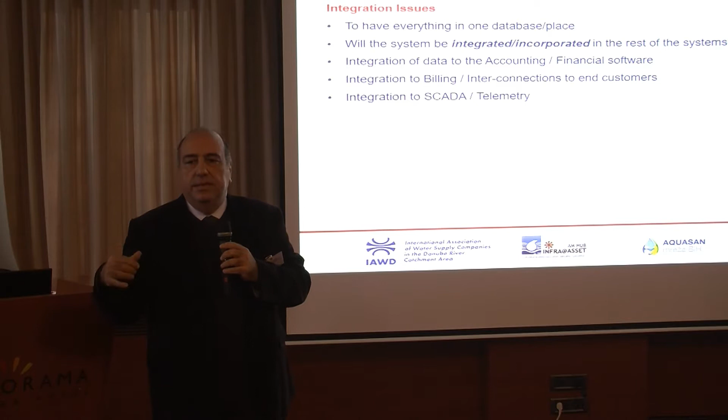One thing I'd like to say is that we as Hydro-Comp are not just producers of software, we're actually integrators. This is our job, this is what we're doing. We know that when we go in a municipal environment, in a utility, they have systems. We're not going to rediscover Earth. We've been there. We know there is a billing system. We know there is a SCADA system. We know there is an accounting system. We know that the utility expects these things to be integrated. So this is part of our overall methodology, overall understanding, and they will be addressed in this session. So, one part of your questions were integration issues.

The second part were related to maintenance and rehabilitation. You asked us, what about management reporting? What about supporting our decision making? What are we going to do about that? You also asked about real calculation and amortization cost. I found that very interesting. And also, one gentleman asked the question, how do we move from reactive to proactive maintenance in our organization?

And the last question, also very interesting, what's the logic of all this program? Why are we following these steps? Why are we following this methodology? Where are we getting to? What is the benefit for the municipality? Why are we doing what we're doing? That also will be addressed.

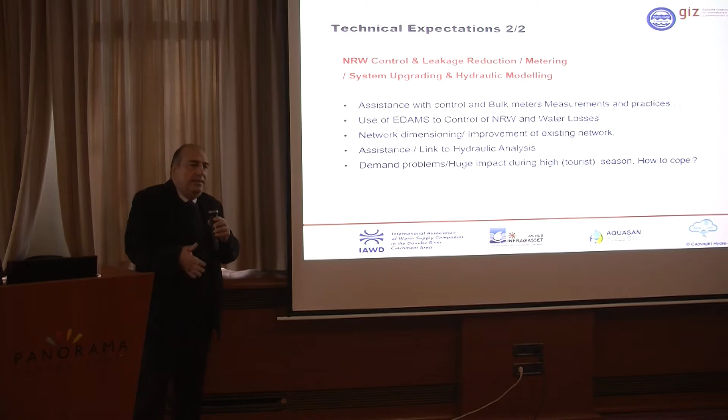The last part were more interesting questions. They involved more technical issues, everything and anything that had to do with non-revenue water, leakage reduction, metering, upgrading, and hydraulic modeling. Now, the questions ranged; some of them were, how do we control the bulk meters and the measurements? What are the best practices? How do we use EDAMS to control non-revenue water? Does what we did in stage 1 have anything to do with non-revenue water? That was one of the questions.

What about network dimensioning, as you mentioned, and improvement of the existing network? We know we have a problem, a network that's dysfunctioning, for whatever reasons. Because, like it was mentioned, in the past there were PRVs installed, in the past there were networks interconnected like a spaghetti system, and nothing makes sense anymore, and we can't make sense out of it. What do we do about it? How will what we do now help us in this process?

That was another question. And then, okay, what we've been told is hydraulic analysis. Where is the hydraulic analysis? Why are we not doing hydraulic analysis? Why are we just capturing data? That was another question.

And the last one had to do with demands. I had a gentleman mentioning the huge variation they have from the high season to the low season, and how that impacts the actual capacity of the system. That's also a serious question, a more complicated one.

So these three sets of technical questions were mentioned earlier. I will try partially to address them through what we're going to do in stage 2 and 3, and then I'm going to come back to these questions after the presentation. So I hope you find this session interesting. My agenda is to describe what will happen next year, 2018, and what will happen in 2019. And in the process, I hope you will see the logic and how the puzzle is built up.

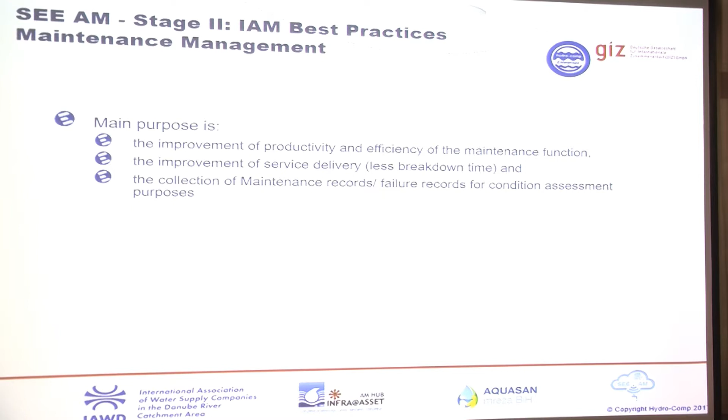So, stage 2 is maintenance. We have to do a number of things to improve maintenance practices. And the purpose of maintenance we can summarize in 3 steps. By addressing the maintenance function, we improve productivity, we improve service delivery, and of course we collect maintenance records and failure records for condition assessment.

Condition assessment, don't forget it. We're moving towards rehabilitation planning. We want to control rehabilitation. That's where the money is. That's where the investment is. That's where the budget is. We have to, in stage 3, look into rehabilitation. If we don't manage to look into rehabilitation, you will never control your costs. But to do that, we have to have reliable maintenance. We have to have properly recorded the maintenance related to our assets. So, we can't jump steps. We have to follow the full roadmap.

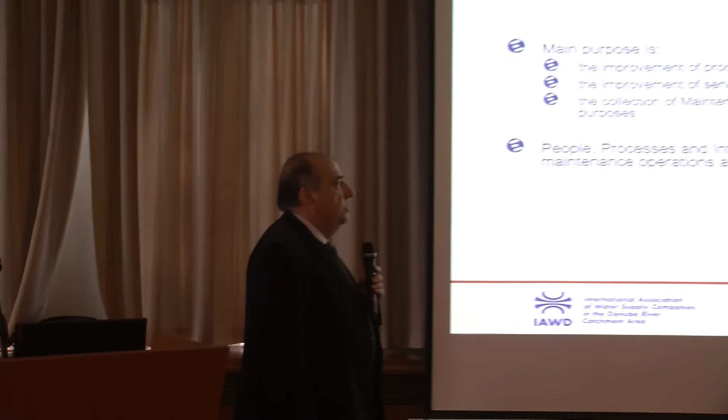So, in the process of next year, we will address people, processes, and information systems, which must be improved to enable proper maintenance operations, according to what we understand, what we have learned and what we have developed from our experience, that is best practices.

At the last training session, we touched the subject of movable and fixed assets. And we said that, look, this is not just about networks. What we're developing is an asset management infrastructure. What we want to do is record all our assets. You must think a bit out of the box. We're not only looking at the networks. Yes, the networks are the most important. Yes, we understand that. That's the source of the problem. But a pump station has a lot of assets, a lot of items. A small treatment plant has hundreds of pieces of equipment.

Where are these recorded? I heard from a number of gentlemen here: how are we going to link to the accounting system? Yes, very good question. How are you going to link to the accounting system? You haven't recorded everything here. How are you going to link? You need to create a full, reliable technical database. One full source technical database if you ever want to link to your financial system. That's the answer to your question.

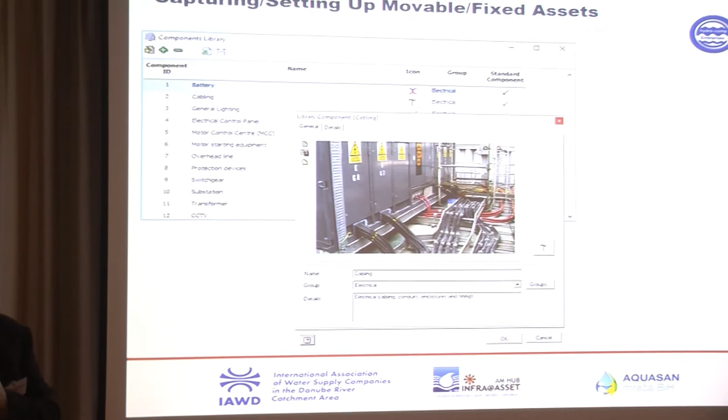And in that process, we try to make it easy for you. We have developed a whole components library where we have created more than 150, 200 standard types of assets that the utility has. You just pick and choose. We know what is in a treatment plant. We know what is in a reservoir site. We know what is in the pump station. You just have to build it up, and you have to build the hierarchy.

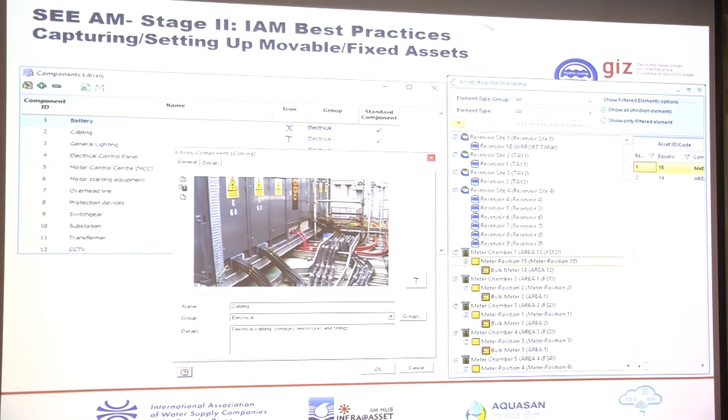So we touched the subject in the final training a month ago, but we're coming back in force. In the trainings next year, this is the opening subject, facility management. We explain to you again, but in more detail, how you have to build all your equipment. And we explain to you how you classify equipment, and how you classify and build the hierarchy in a treatment plant with the different equipment, and so on.

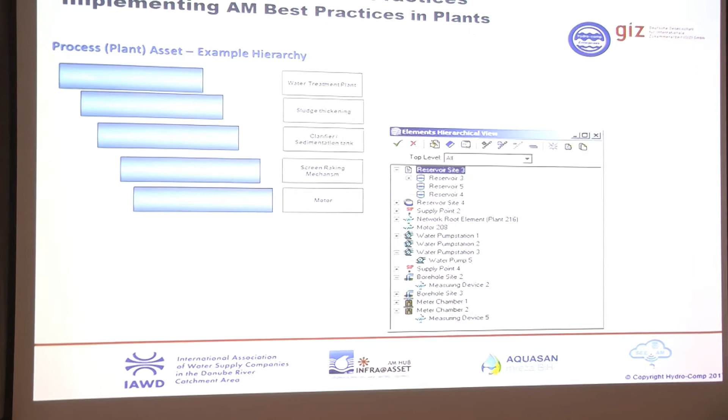So, we want you to record everything. You managers, one part is the network, the other is your equipment, your facilities, everything that you have in the utility. Don't think that stage one finished. There is no stage one finished. Stage one goes indefinitely. Don't think that you finished because in a couple of months the first year finishes. We just started. Any stage we start, it just opens forever. That's our intention anyway. But it must be your intention also.

You started building your asset registry. You will continue building it. Don't think of deadline. There is no deadline here. You're not supposed to finish by February. Yes, it would be nice. It would be very nice if you manage to capture everything, but it's not necessary. Think of it that you establish the unit or a number of people, that they're building this asset registry, they learn how to do it, they learn the procedures, and they will continue doing it indefinitely.

You should have somebody responsible for capturing and maintaining the assets. For bigger utilities, it might be a number of people. For smaller, it might be one person. But the fact is, somebody must be responsible. So, beginning of next year, we're going to touch facility management as an introduction to maintenance. And what we will address is computerization of the maintenance function, call center. If you don't have a computerized call center, that will be part of what we're doing. We want to have back-to-back integration.

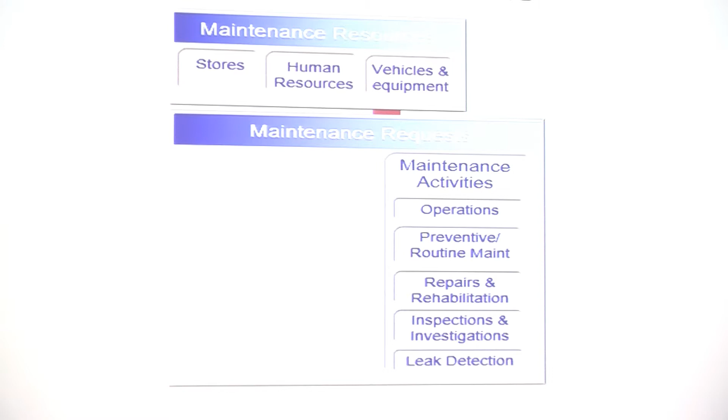This process will be supported again by the EDAMS system. The heart of the system is what we call maintenance requests. The system understands and it has a whole library of maintenance activities. So you're going to see when you start the process, we have a full library of 1,000 standard activities that the utility is doing. All of it translated in Serbian and in Bosnian. So this is what the utility does. This is your Bible. This is your best practice.

If you replace a meter, that's what you do. You go there, you take it out, you clean. It's 10 steps. That's the best practice. You might say you do it differently, fine. You can customize it. But from our side, we're telling you what is the standard practice and how it is developed. So we have all these maintenance activities, and based on that, the different maintenance requests come,

either from a call center or from ad hoc requests. Somebody came out, a field team or a foreman, and saw something is wrong, and he's reporting it. He wants something to happen immediately. That's a maintenance request. Or what we want to move the utilities to is programs. That gentleman's question, he said, we want to move from reactive to proactive. That was an excellent question. That's exactly what we're trying to do. We want to introduce as many programs as we can into the utility.

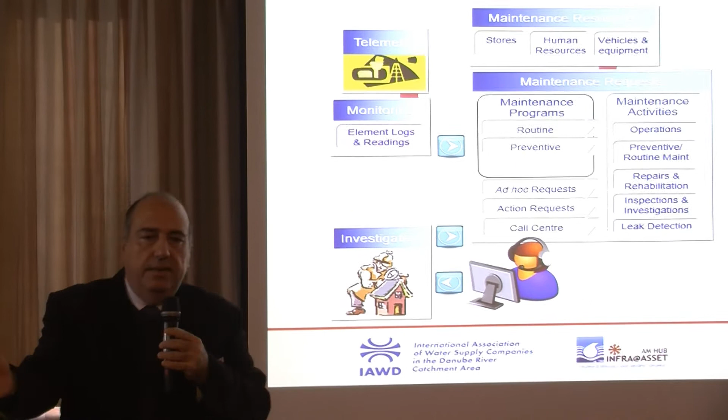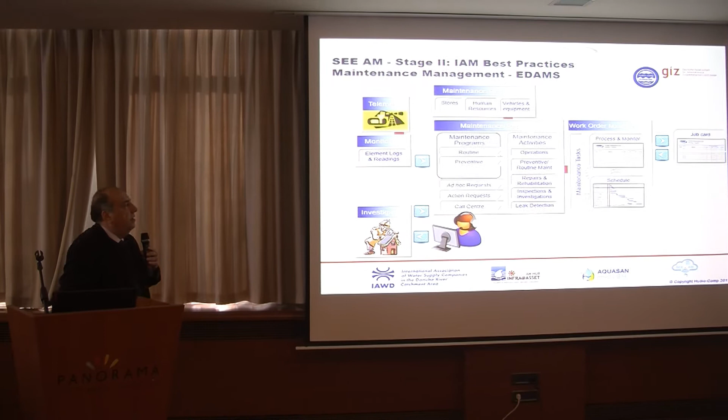Programs like routine programs or preventive programs. Preventive programs are statistical programs. Like you have 10 cars and you say, I'm maintaining these cars every so many kilometers. That's a preventive program. Or proactive programs. And altogether, the maintenance requests are translated to work orders. And the work orders are job cards. Job cards are opened, job cards are closed. And what do they create? They create a history of jobs and a lot of possibilities.

A lot of possibilities. These possibilities we want to create because 90% of your management reporting comes from maintenance. So having everything captured in the right way, we can start doing proper management reporting and proper decision-making support. We can analyze the data, we can do budgeting, we can have performance indicators, we can do more advanced failure analysis, and so on.

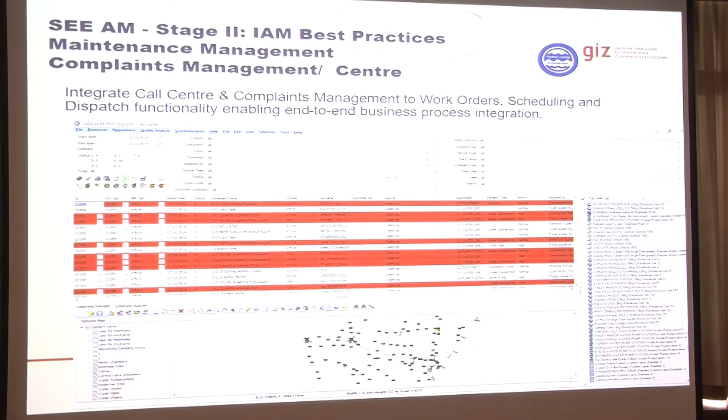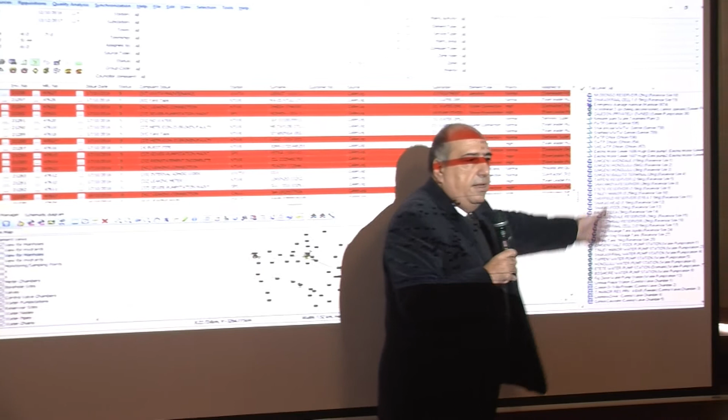What you also see here is a typical screen of the system. This system has been developed a lot based on the long experience of the Belgrade Waterboard. With their assistance, we completely redesigned the system. But the fact remains that it's simple. The screen might look complicated, but it's only that screen. Here is your network. Here is your hierarchy. Here is your backlog. Everything in red is outstanding. And everybody sees the same screen, but a different list.

Everything against his name, he sees what he hasn't done. It's his backlog, as we say. What he needs to do. Everything is here. You manage by backlog. As managers, you can go in and in 5 minutes see for every single employee what he hasn't done, what is outstanding. You can manage immediately by exception. You can see what is outstanding against his name, what is his backlog, why it hasn't happened. So you're taking control of your maintenance function.

And as I said earlier, by doing this part, we can start addressing other things in terms of supporting management and decision making. Budgeting, job costing, performance indicators. If data are captured properly with the standard procedures, reports are easy. If your data are a mess, everything is a mess. Even the simplest report is very difficult to produce. So, job costing becomes easy.

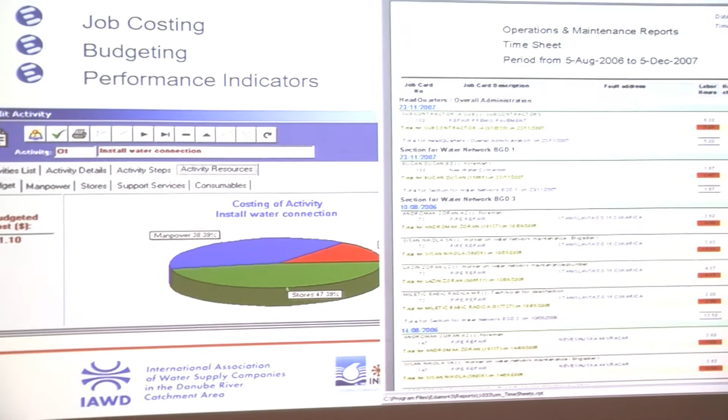Time sheets. Exactly how much time each employee is going to spend, programming his time over the next week, over the next month, what activities are outstanding, how much it's going to cost, and a whole list of more than 150 to 200 available reports at your fingertips that you can immediately use, produce and customize according to your requirements. All the functionality is there.

These are reports, again from BVK. Overview of faults repaired. Number of faults per zone, per DMA. Number of faults per month. Outstanding job cards against a name. Jobs that haven't happened. Scheduled, planned jobs. And a lot of graphical reports.

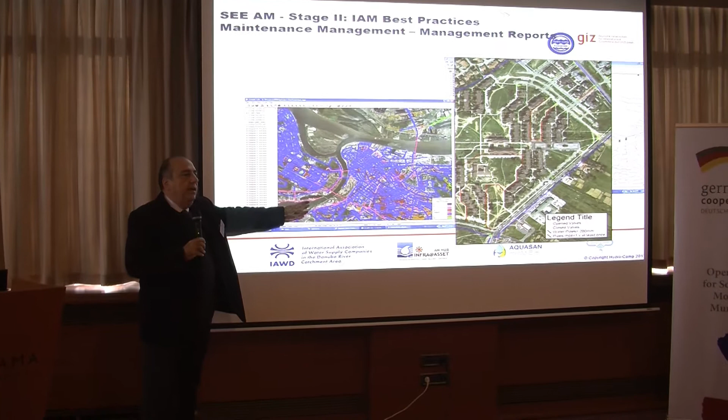Don't forget, we had the very nice idea to capture the networks. So because we have the networks, now we can see everything graphically. So I can see how many pipe breakdowns I had last year and how many pipes were repaired more than 3 or 4 times in the zone. I can see it immediately on a map because I have the networks. And I can link the job cards to the networks.

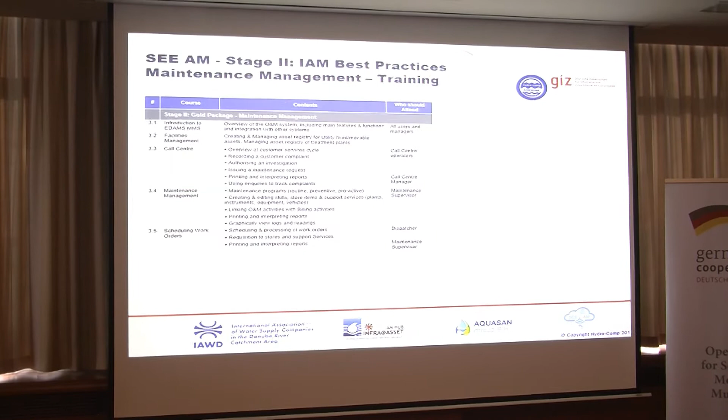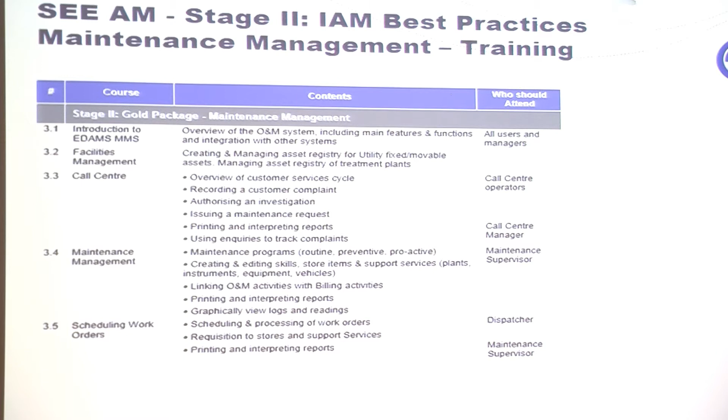These activities of next year will be accompanied by 2 training courses. The first training course is introductory. We'll teach you, as I said, the facility management and also how the system operates, how you should record the calls, how you should do maintenance management, how do you schedule the work orders. So, and in the process, the hubs will assist you to set it up, to operate it, and to follow

the right procedures. And we're going to come back, and once you build that history, we're going to discuss exactly the whole process of analyzing the data, how do we manage our work orders, and how we use the different tools for budgeting, for audit trail, for performance evaluation, and so on. So this is the main target of next year.

And actually the calendar of activities starts from April. Preliminary, we have the first training course scheduled for end of April. And the advanced training sometime beginning of September. And hopefully we'll all be here again in December for the workshop. So these are the 3 main events for next year for stage 2 of the program.

So it's a difficult stage, it's a tricky stage, it's a very intense stage. The difficulty lies on you more than us. We can support all this infrastructure, we can support this system. Your responsibility is to enforce it. When I say enforce it, I'm saying it again. The most difficult thing in a utility is to change practices in the maintenance division. Remember that.

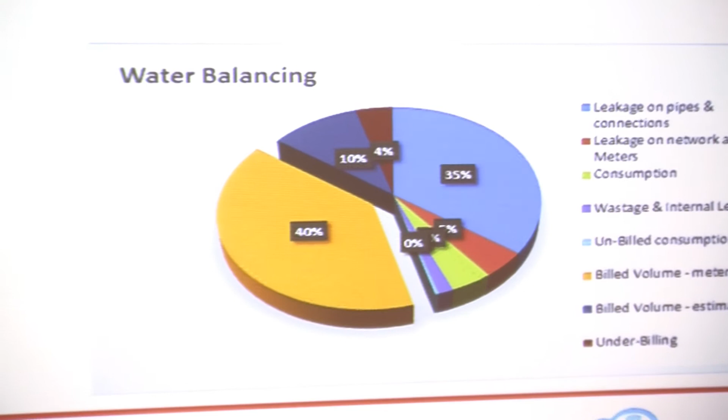And that creates a lot of confusion. Because you have consultants coming in and telling you, break the system, yes, fine. Put bulk meter here, put bulk meter there, put 20 bulk meters. In the meantime, they're destroying the network. They're destroying the pressures. And then one brings the other. They say, oh, you know, there's no pressure here. Or there's too much pressure here, put another PRV. So you start creating a very high complexity within the system because the whole process was wrong.

Because a simple concept, a theoretical simple concept, is not understood. So we have to go back to basics. We have an excellent tool, the Zone Manager. Excellent tool. What that tool does is ignore what you have done. It ignores completely what you have done. It tries by itself, unsuccessfully sometimes, but it tries by itself to recreate your zoning. It says, I don't care what you've done, I don't care what you think, I'll tell you what your zoning is.

And if your data are correct, it will recreate by itself your zoning. And that is your true zoning. Your true DMAs, your true pressure zones. We're going to come back to it. As I said, it sounds simple, it's not that simple. But from our understanding, it has everything to do with distribution management.

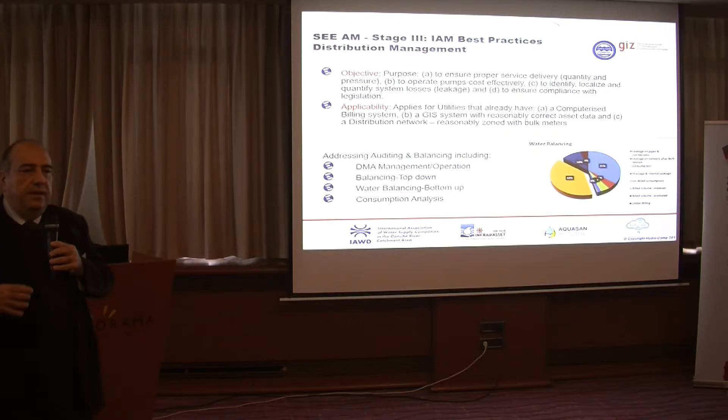Okay. So, what are we addressing here? We have a very nice infrastructure that we call non-revenue auditing and balancing. It's a separate subsystem with a specific purpose to manage DMAs. If we have built our asset registry properly, now we're putting in the infrastructure to actually capture and control our DMAs. But before we get there, as you can see, these are the modules that come with it. There is a separate module for zone management, for commercial data evaluation, and for an unaccounted for water analysis.

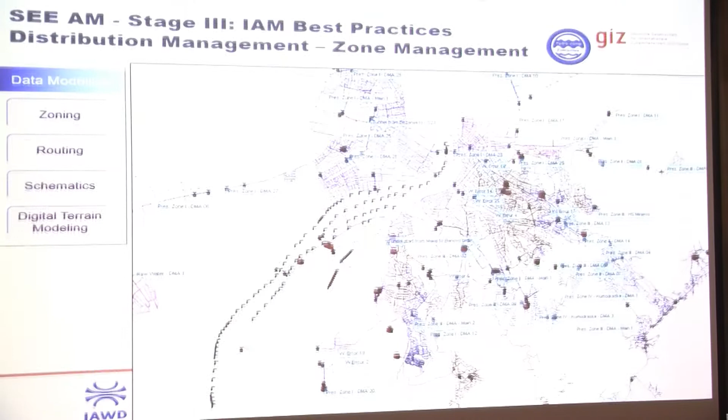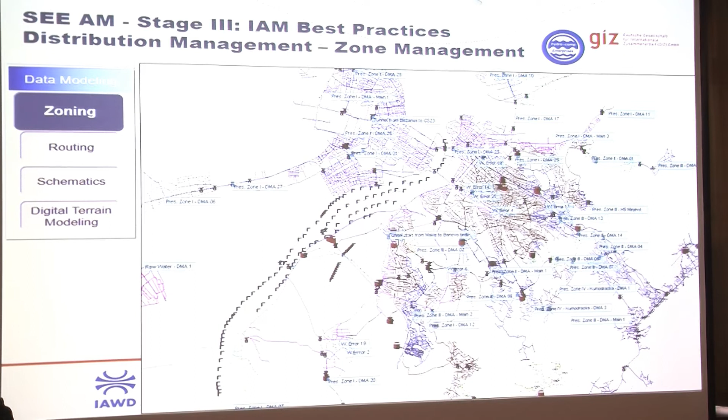I will say a few things about commercial data evaluation because this is a more complicated thing. But the unaccounted for water analysis module and non-revenue is the heart of the system. Part of it is what we call supply analysis and zoning. Zoning, some of you have seen. Your whole system must be regenerated by the system. To start discussing distribution management, we must have the same picture in the system as the one you have on your walls. We must be able to see and understand the zoning the way you understand it. If we have a disagreement, there is a problem.

Either what is in the system is wrong, and you are right, or you are wrong, and the system is right. Can't be both. So, the starting point is the zoning. At the beginning of stage 3, we must all have the same understanding that these are your zones. If we don't, there is a problem. Okay, I won't go more into it. And then,

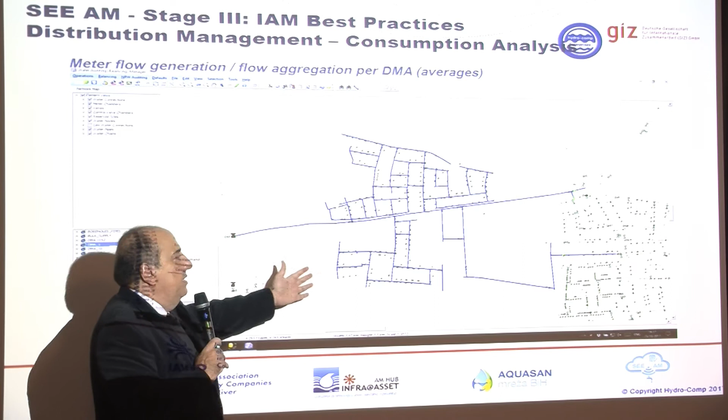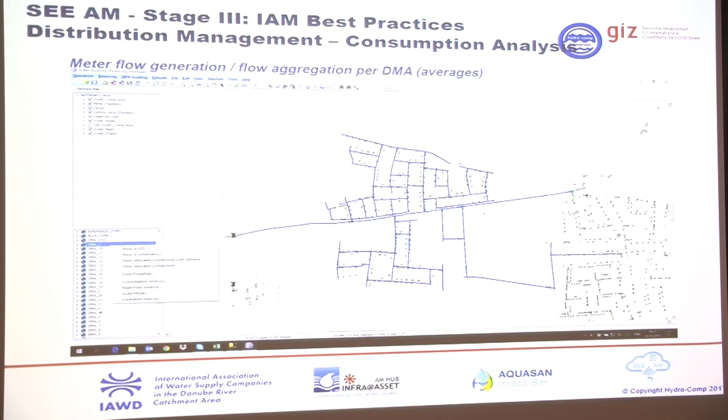if we have the layer with your connections and the demands from your billing, we can relate for each of these DMA zones your connections, your consumers, to the actual network. The system will do that automatically. And what the system will do is aggregate the demands for the whole zone. But it will also do something else. It will do what we call supply analysis.

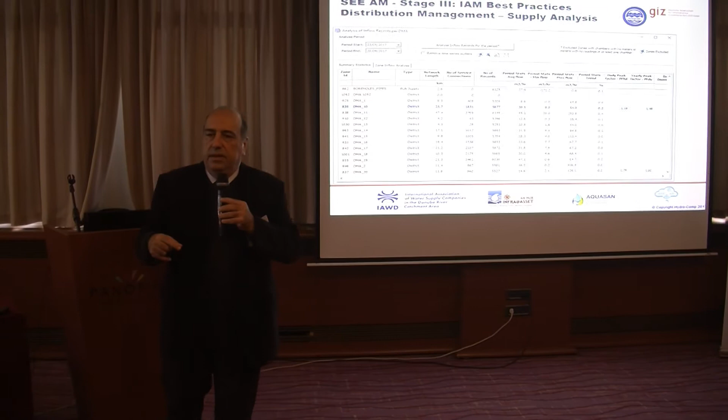Now, for utilities that have a few bulk meters, that's not a big issue. If you have 2, 3 bulk meters, it's fine. You manage them. But the problem is, with time, you start putting in the system more and more bulk meters. The 3 become 10, they become 15, become 20. And how do you manage these bulk meters? You say, I'll put telemetry. Excellent. So now you have 20 bulk meters and you have a very nice telemetry system.

And now you have all these signals and all these records coming from the telemetry with interruptions, with wrong readings, with wrong flows, with spikes. How do you use this data? How do you get from the telemetry readings to balance your DMA zone? That is the question addressed by a module called supply analysis.

We also didn't know. We found out from real practice. We went again and again to utilities and they told us, look, we have this problem. We spend a lot of money putting in telemetry, but we're not getting what we want out of it. It's not what we're supposed to get. How do we use that data? How do we relate this data from the telemetry to our DMA zones? So that infrastructure is in, and the process is called supply analysis.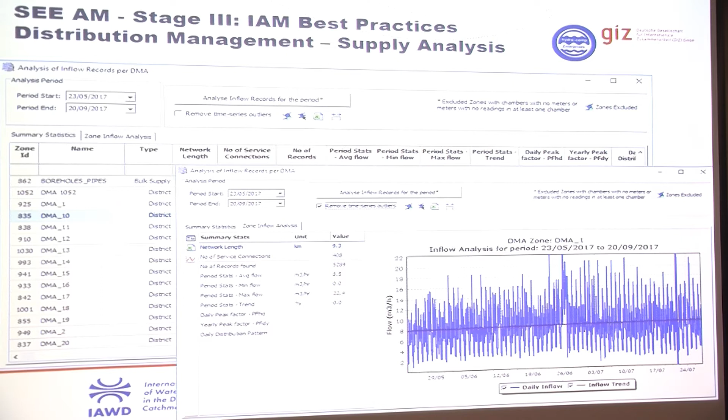So we bring the data in from the telemetry. We link to the telemetry. Since it was asked, we're going to explain how you're going to link to the telemetry. If you have a reasonably recent telemetry system that we can actually link to, one that is not ancient and doesn't work in a proprietary database, we should be able to link. It's easy, it's not so difficult. It should be a straight database. So we establish a link and we start bringing in these telemetry records and filter them and analyze them. And what do we do? Before I go here, let me go up again.

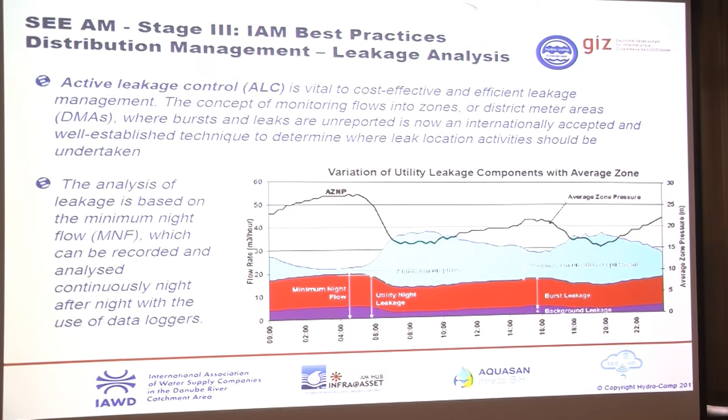What do we do? We link them to the bulk meters. So we take each telemetry record, we link them to the bulk meters, and we group them, because our zone manager knows which bulk meters belong to which zone. So it doesn't matter if you have 3 bulk meters in one DMA zone, the readings will be grouped automatically. That's called supply analysis, because where I want to end up is with one inflow going into the zone.

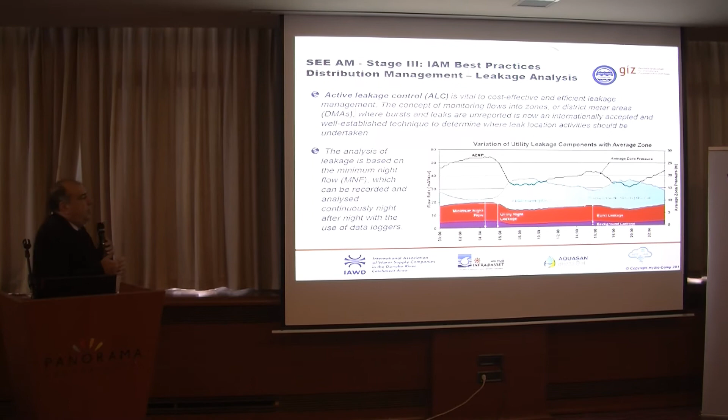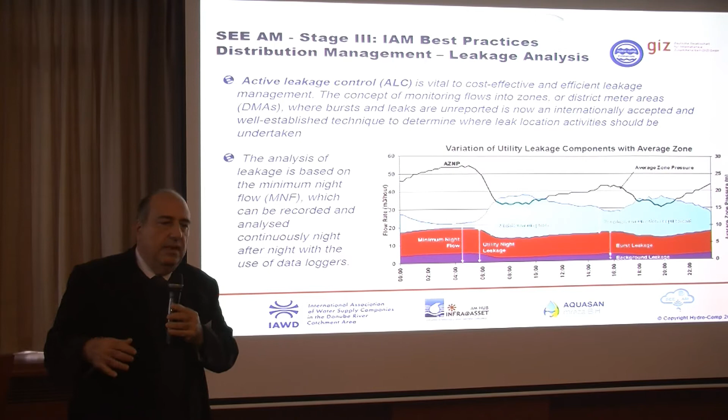What is our final objective? I'm not going to go into the theory here, but what is our final objective? Everything we do follows IWA practices. The system has fully incorporated IWA leakage control practices. IWA discusses and propagates active leakage control. We want to be able to react as soon as possible to leakage incidents and prioritize the zones and prioritize the problems.

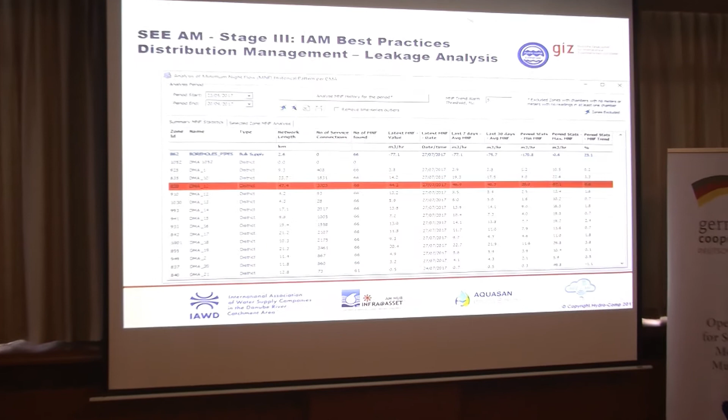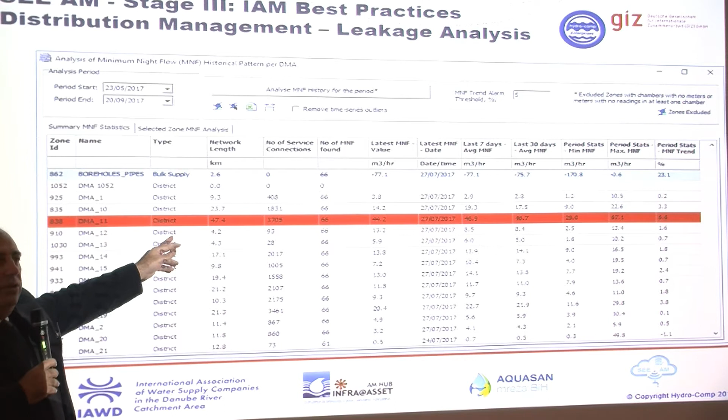So the system, once it's set up, automates the process. Here are your DMAs. It picks up, recreates the night flows. It generates for every zone the actual night flow and prioritizes. And you can even have alarms that tell you that something is going wrong in DMA 11. So automatically, every day, it can give you these kinds of alarms showing in which zones you have problems.

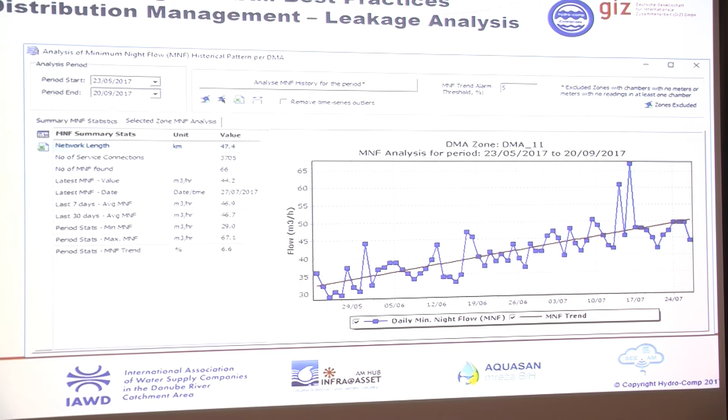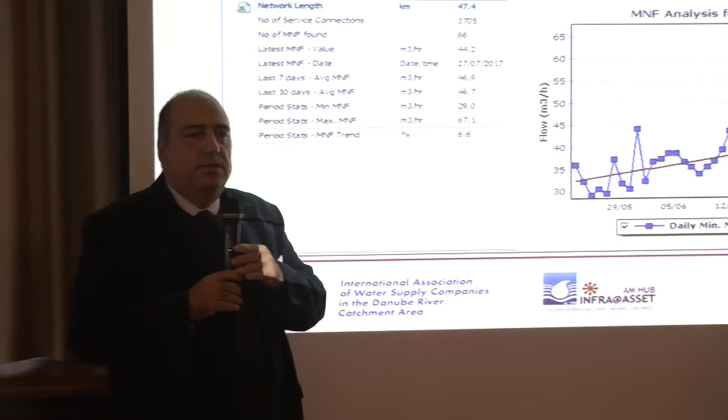And it does a few fancy things, like the graph you see here. This is the MNF trend. Whoever has worked with this kind of analysis on non-revenue water, what do you want to see? You want to see the minimum night flow, and you want to see the trend of the minimum night flow. You want to see where it's going. If the minimum night flow is going up, you have a problem. That zone is problematic. You have major leakage going up. So that kind of analysis the system does from the telemetry records and the supply analysis. That means active leakage control.

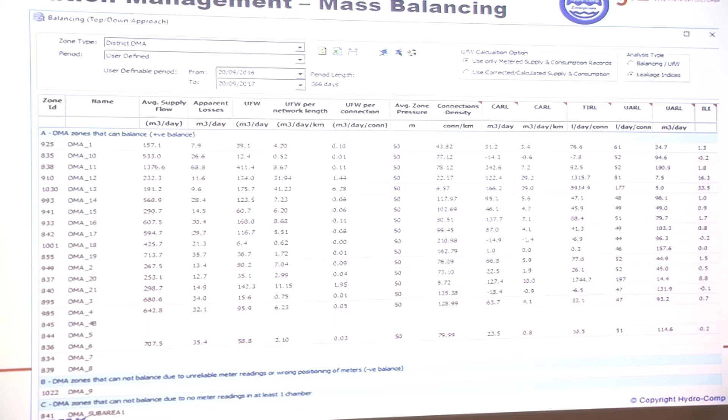But we can also follow the top-down approach. What I just showed you briefly is the bottom-up approach. We can go with the top-down approach. Top-down approach means we balance the supply with the billing records, with the grouping. And again, we can see for longer periods, for a week, month, year, what is the actual balance for the utility or for each of the zones. And we can produce, again, different types of graphs for any kind of period.

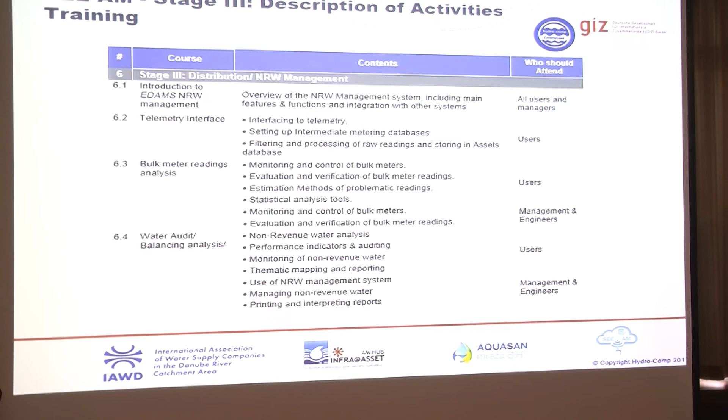This session is accompanied by training for understanding how we link to telemetry, how we analyze bulk metering, and how we do balancing top-down and bottom-up based on IWA practices. The full best practices of IWA are incorporated in the system. Everything we do doesn't negate any other non-revenue water activities you're having, because we're following the same rules. In fact, if you already have other activities for leakage control or unaccounted-for water, or other organizations providing you support for these activities, this fits excellently because we follow best practices.

So that closes the subject and the introduction to non-revenue water, because we will start discussing more about non-revenue water. You'll stay here till tonight. So this was a very small introduction. I'll move to the next issue, which is rehabilitation planning.

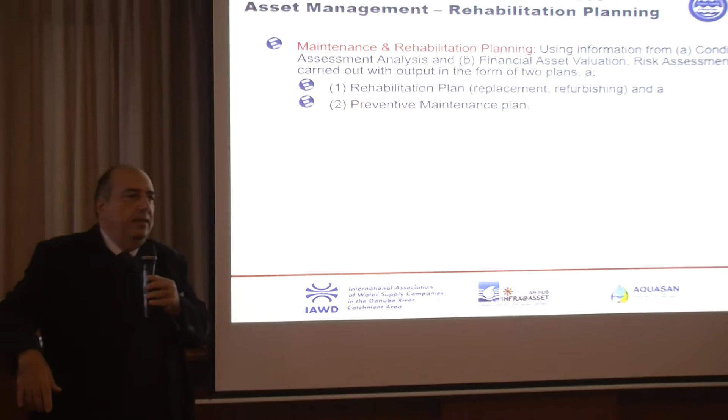Some people say rehabilitation planning is the heart of asset management. If you go to the books, the bibliography, this is true asset management. I got the question, when are we going to do real asset management? Well, this is real asset management. In terms of asset management practice, rehabilitation planning is the real asset management. If you Google it, that's what you're going to get. So, in stage 3, we are addressing rehabilitation planning, which is the real asset management, as people say.

That includes 3 parts: condition assessment, financial asset valuation, as was mentioned earlier, amortization as it was called, and risk assessment. Because at the heart of asset management is risk assessment. You have to address risk. Risk of breakdown. What is the actual risk? And the purposes are pretty obvious. We want to minimize the cost of ownership, minimize the risk of failure, improve the level of service, and sustain the infrastructure in working condition.

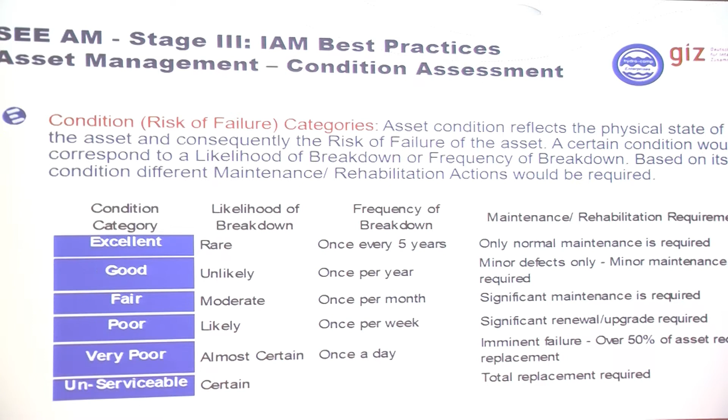There are a few concepts that from now on you'll see appearing again and again in the system. One concept is the condition categories, part of the best practices in the system. You will see it this year from maintenance. When a foreman goes out and inspects something, he'll be forced to categorize the asset according to these categories. Not a comment, whatever he feels like. He has to classify it in one of these. Each one relates to an actual meaning, but he has to classify the condition according to standard categories.

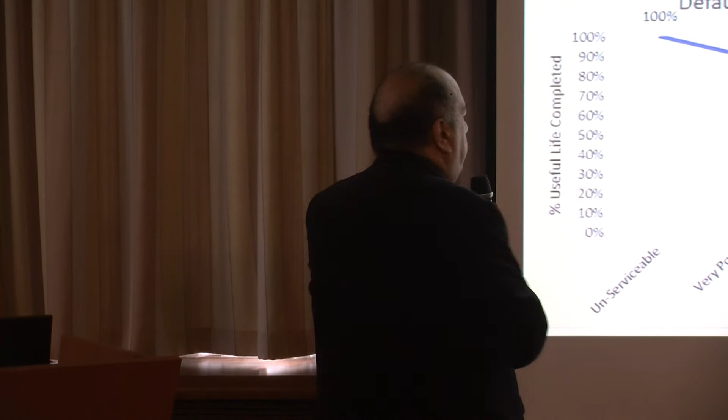And then there are other principles like the deterioration curves. Because if we know the condition of the asset, we can relate the condition of the asset to the percentage remaining useful life. It's like you have a car, and you take it to a service, and they tell you it's in a bad condition. You expect it to have another 10 years, it has another 2 years. It's exactly the same principle. So you relate percentage useful life to the actual condition of the asset.

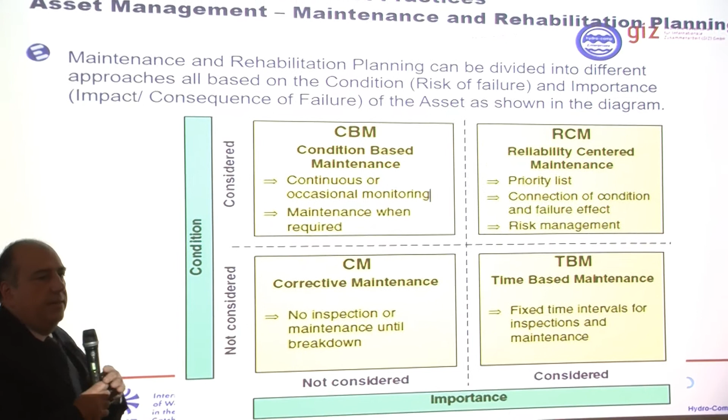And where we want to move it is to understand this kind of a matrix. Because this kind of a matrix will determine the kind of maintenance we're going to make. Because we want to move the utility, at least for the important assets and for those that we know the condition, to do reliability centered maintenance. So we want to move the utility to define and have priority lists and classify their assets in terms of risk assessment and priorities, to be able to schedule their actual maintenance.

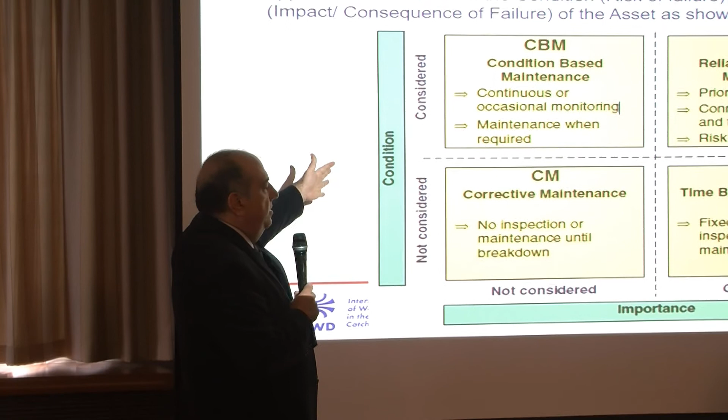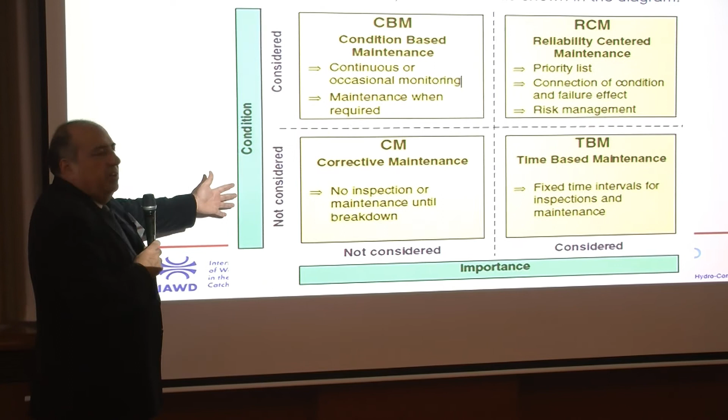So just quickly to explain this matrix. If an asset is not important and we don't know the condition, then we do nothing, we just let it break down. And when it breaks, we fix it, or we throw it away. If an asset is important, but we don't know its condition, a car, then we normally do time-based maintenance. So we say every 5,000 kilometers you must bring it for service.

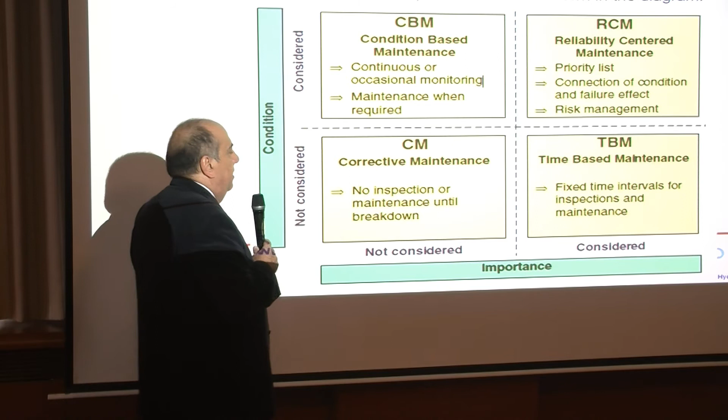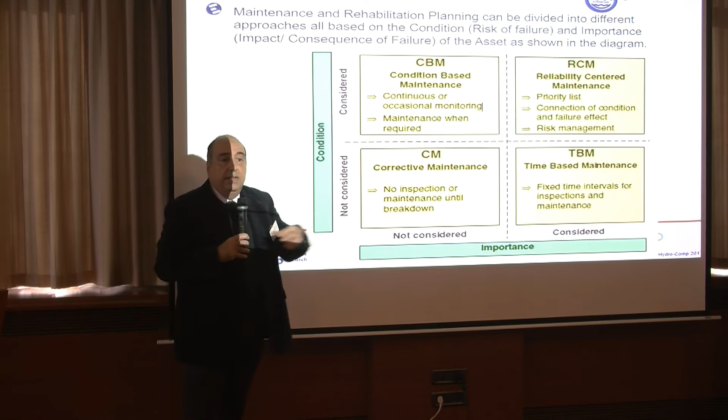That's time-based maintenance. If an asset is not important, but we know its condition, then we do condition-based maintenance. You have a pump. It's not important, but you know its condition. You know it's going to break. So based on its condition, you go and fix it. But the main block is the last one, because if an asset is important and we know its condition, then we must put it on a priority list because it's an important asset. That must go for rehabilitation and must be prioritized according to the risk of breaking down. That's the logic we're building from next year.

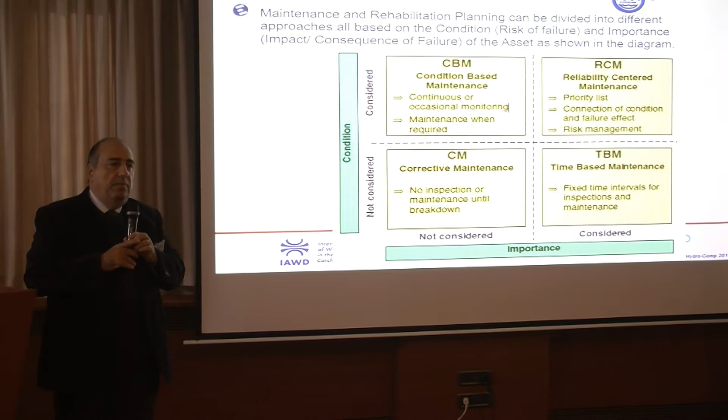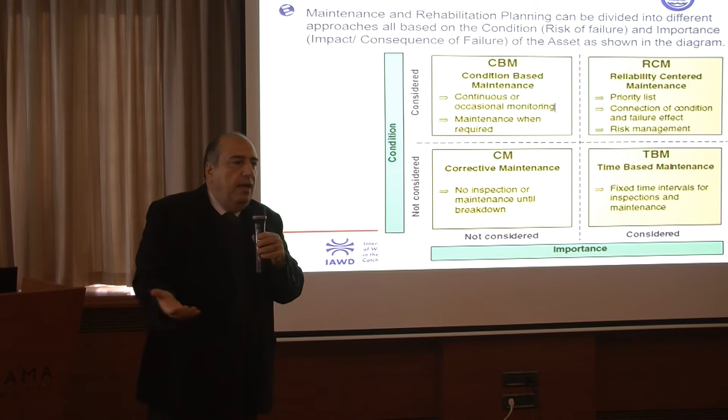How do we actually prioritize maintenance? That's called rehabilitation planning. And that is a big issue in asset management because it affects budgets. That's your budget for rehabilitation. That's what you're negotiating with the municipalities. That's what you're going and asking money for. How are you going to convince them? You need to be able to assess risk. And then comes the concept of importance. Importance means, what's the consequence of failure of this asset? How important is this pump station for you?

That's the importance. And we assess importance in terms of 3 impacts. How much is it going to cost the utility if it breaks down? What does it mean in terms of continuity of supply? What will happen if this pipeline breaks down? How long will the whole town be left without water? And water quality. If there is pollution, or if that thing breaks down and creates pollution, a chlorinator or whatever, what does it mean to us?

So, you might have noticed, I got a question from a few gentlemen or ladies. They were actually asking me why in every asset they open there is a little box there asking for the importance of the asset. That is why. Because we want you to mark, and we want you to look at the importance of every single asset, particularly system components, particularly assets which are very, very important.

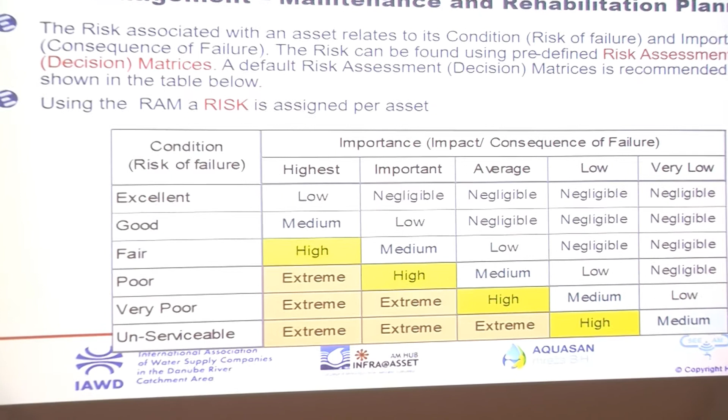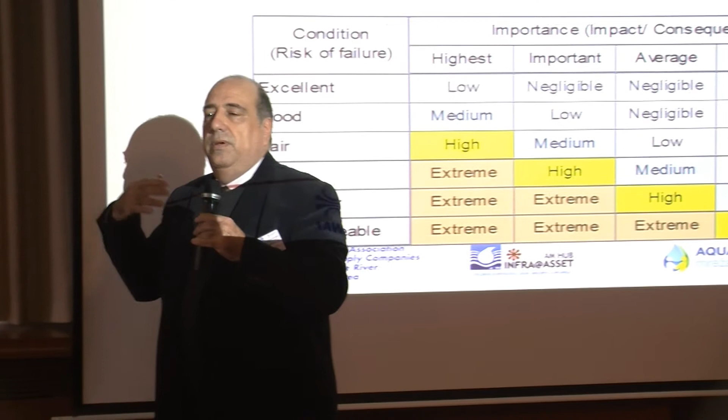Where do we end up? We end up here, to a matrix that relates the importance to the condition of the asset. And that's called risk assessment. So this is a decision matrix that relates the importance and the condition. So if it's extremely important and it's in a poor condition, that's high priority. This is medium priority, this is lower and no priority. That's the methodology we want to introduce, and we want to train you with a specific module called rehabilitation planning and a specific procedural methodology for how you should do rehabilitation planning. How should you prioritize your assets for maintenance or upgrade.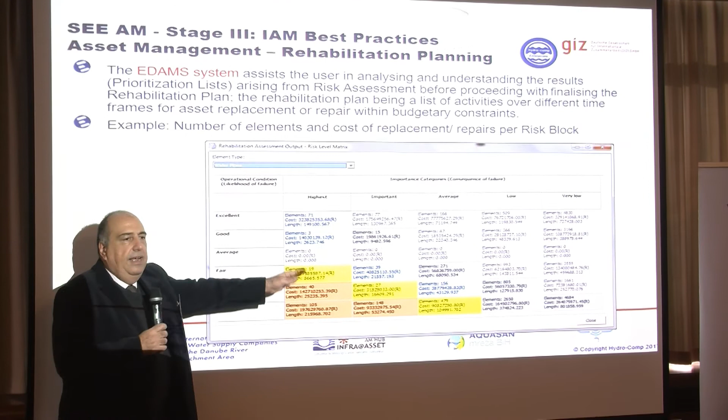So, again, different activities, different modules, we're building it up: condition assessment methodology, financial evaluation, rehabilitation planning. I won't say more into that, but that's a typical output from the system, filling in the boxes with the different elements, the different assets that need to be prioritized, and what the cost is going to be for each one of them.

Training, again, a training session specifically for rehabilitation planning, where we're going to address all this methodology, we're going to address risk assessment, we're going to address how you build a decision matrix, you're going to build decision templates by yourself, you're going to prioritize your assets by yourself, and this is the practice you will start to implement, hopefully, in your utilities thereafter. And we complete the main elements with infrastructure planning. There are too many things we tried to put together, but they were all asked in your questions. So there's nothing to be left out.

So, infrastructure planning involves a lot of activities. It involves emergency plans, it involves master plans. We're going to focus on one type of infrastructure planning, the quick win. This is the upgrading plan.

We want to answer the question: okay, I understand that it would be nice to have a few millions to upgrade the whole system and fix the system, but I don't. What do I do now? What can I do to fix the system with a minimum cost? What can I do to optimize the performance of the system?

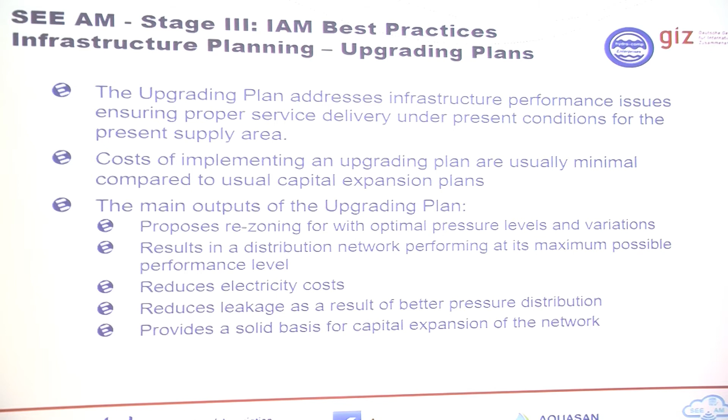And of course, if you do that, it will have an impact on everything. It will have an impact on leakage, on electricity, and of course it will be the correct basis if you ever want to do maintenance, if you want to do master planning. So, upgrading of the network is an important exercise. Of course, we're not going to do the upgrading plans for all of you. We're going to teach you and give you examples of how it's done.

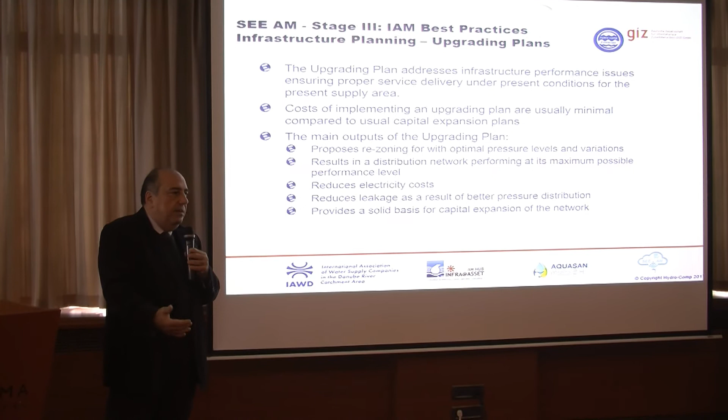But the methodology is the important part. And the training courses will include evaluating an existing network, and then a proposed network, what's the optimization methodology, how the rezoning should be done, and how the pipework should be reconnected.

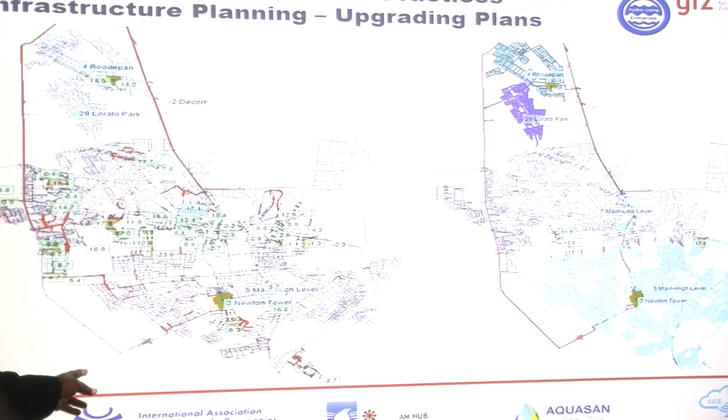This is an example of a network. The first trick we do in a network is we forget the zoning. And we say, all right, let's see what will happen in the system. The tool here is hydraulic analysis. This is the place for hydraulic analysis. To do what we're discussing now, you have to do hydraulic analysis. So now you look at the network and you say, all right, without zoning, what will happen?

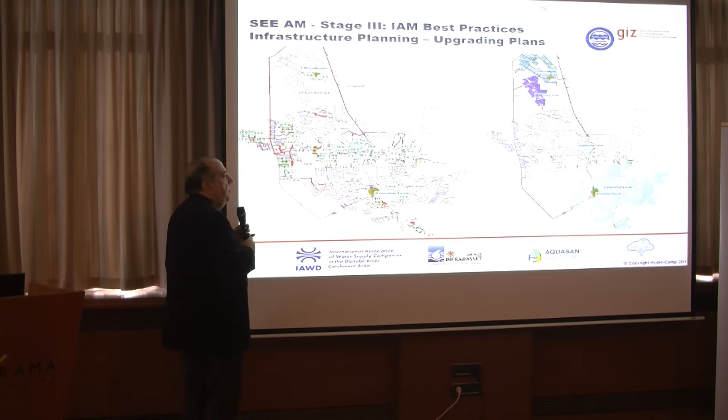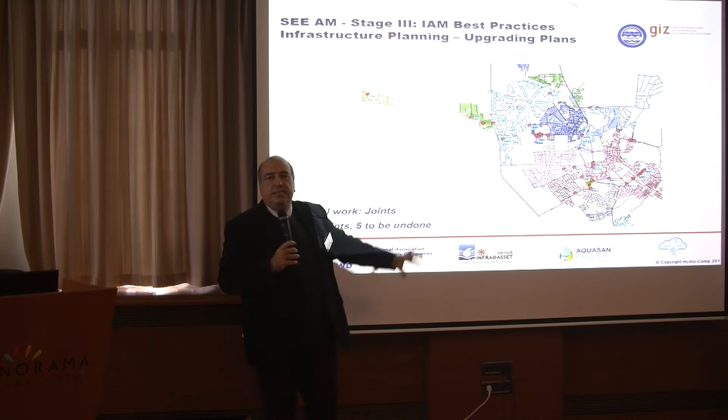These are the pressures at peak conditions. This is what's happening. Let's look at what I have now for zoning. What exactly happens to the system? Let's see why it works, why the pressures drop. And then you come up with a different rewiring and you say, look, we're going to break the system differently. We're going to change the way the system is wired. We're going to change the way the system is connected.

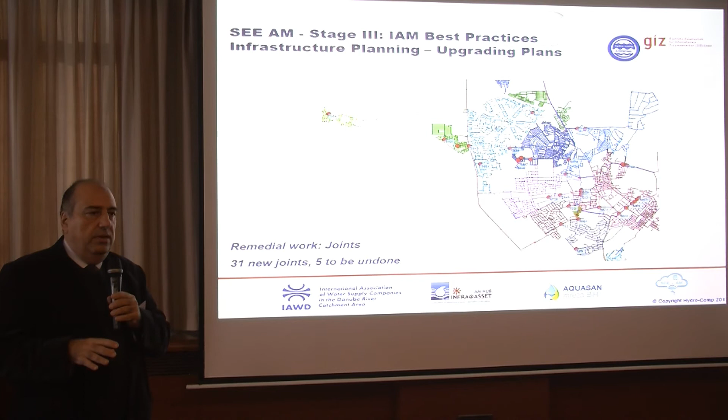We're going to take these 10 PRVs out. We're going to reconnect these 10 pipes. We're going to do this, do that. Small interventions in the actual system to normalize pressures and normalize flows, because things got out of hand and the system doesn't work as it should work. That's what the upgrading plan is.

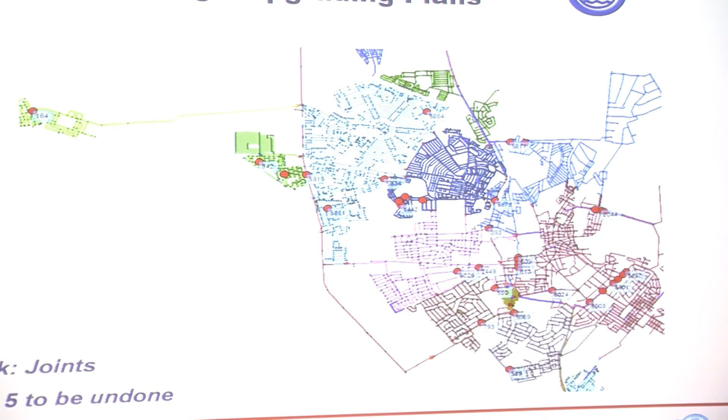Now, why is it critical? All of you understand why it is critical, but it's critical for another reason that is not that obvious. People jump into non-revenue water and distribution management and try to find losses without first optimizing the system. To make it very simple, if you have a zone with very high pressures, first you have to sort out the pressures before you look for losses. You have to normalize pressures first before you address the problem of leakage.

So be very wary if you see consultants, if you see people who are trigger happy. I call trigger happy the people who just go out and start digging. There are a lot of trigger happy people. They love going out and destroying half the city, doing all sorts of things with very little result. Very little result. Or results for 6 months, and 1-2 years later the losses go up again.

That's why the losses problem is not that simple. It requires understanding first your zoning and then how to rewire your zoning, how to change your zoning before you address leakage. I say it again and again, and practice has shown that even in major organizations, major funding organizations, simple principles like that are not understood.

So, of course there will be two more subjects that are going to be mentioned and trained during the presentations, that for completeness of stage 3 we thought it important to include. We understand that the 3 things I mentioned earlier are the most important, but these 2 are also important. The first one is quality of water. How do you manage the quality of water?

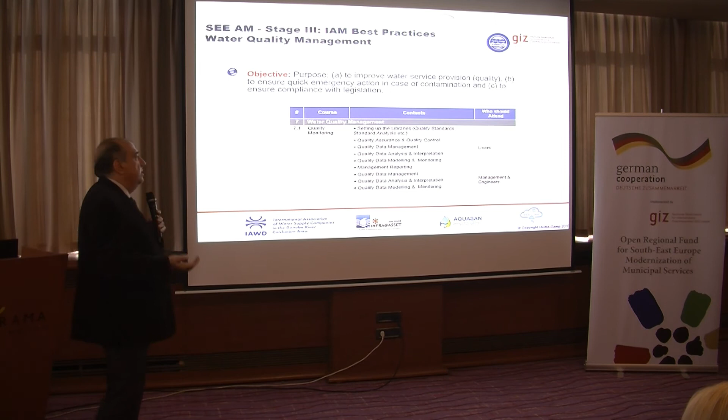So we're going to discuss quality of water, what you should do in terms of quality, in terms of managing different parameters, in terms of standards and so on. We're going to show you examples of how different utilities manage their sampling points and how they manage the records in the laboratories and so on. This is just an introduction to water quality practice. We're going to show you how it's being done in other places in Europe, what the European standards for water quality are, how water quality should be addressed.

And last but not least, we're going to present what commercial data evaluation is. Now, one thing we don't do, because I got this question, we will not link directly to your billing system. Not because we cannot, but because every billing system is individually different. This is a cloud operation, more or less standardized. It's easy to link to a telemetry database, but you have 70 different billing systems, each one written by a different person with different tables, and so on.

What we can do is bring in some minimum records with consumption from your billing system that you provide us. But a live link with the billing system is something we can do later if you require us. We can actually do it, it's not a problem, we do it all the time. And together with that, we're doing something very important called commercial data evaluation. Because non-revenue water has two aspects: it has the leakage and it has your commercial losses.

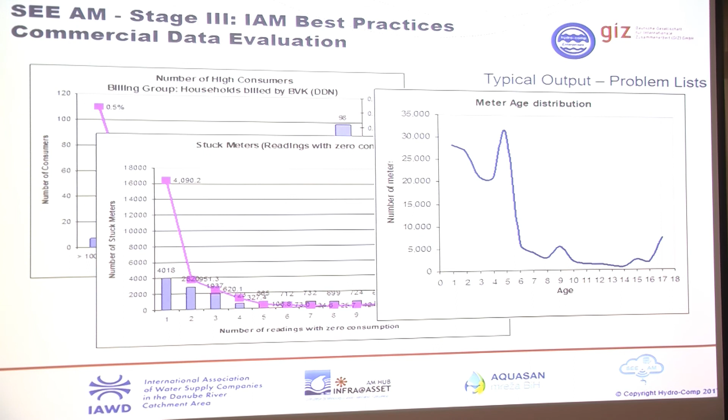And then the different outputs coming from commercial data analysis. Now, our effort is to sensitize you to the problem, to explain what needs to be done and what is required. As I explained, we can't link to every billing system. If you ask us individually, we can do it, but not as part of the SEEAM program, because it's very difficult given the different standards you have.

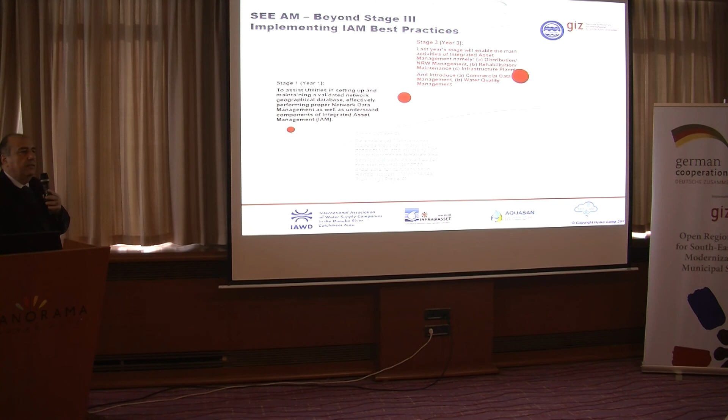So, calendar. As we said, we meet here in February 2019, all of us, for training. That will be the first training, towards the end of February. Then we come again in May. Then we come again in September. And then we do the 4th training course in November. The 3rd year is very intensive. It has 4 training courses instead of 2, and they're quite intensive training courses, because now we're capitalizing on everything we've done in stage 1 and stage 2. And that in a nutshell concludes the whole program.

I would like to say something, last one. We don't see this as the end of the story. This for us is not a 3-year project. It is for GIZ, it is not for us. Might not be for GIZ either. But from our side, it's not a 3-year project. We see this as a long-term relation with yourselves. We see that we're going to be your partners for a very long time. That's what we want to achieve.

We want you to trust us, to build that relation and trust over the next 3 years, to see that you're getting results out, to see what we can do, and actually use our systems, and also use the services of the hubs, because the hubs are the most important aspect of this equation, to support you and improve the whole infrastructure. Thank you.